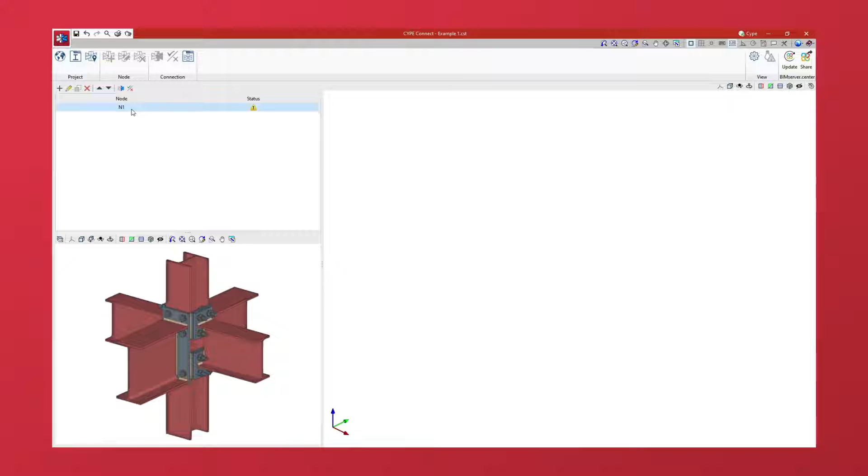Let's see how to enter loads on sections in CYPE Connect. To do this, once the node has been created, we select it in the table on the left-hand side of the interface and edit the connection by clicking on the corresponding button at the top. In the Connection pop-up window, if the model of the connection is already complete, we go to the Analysis tab.

Then, we click on the Loads option in the top toolbar. In the pop-up window, we define the loads applied on the connection sections. We can also generate these loads automatically via Generate from the BIM model. We can also modify them or enter them manually. In this case, we select each of the sections in the table on the left where their reference is displayed.

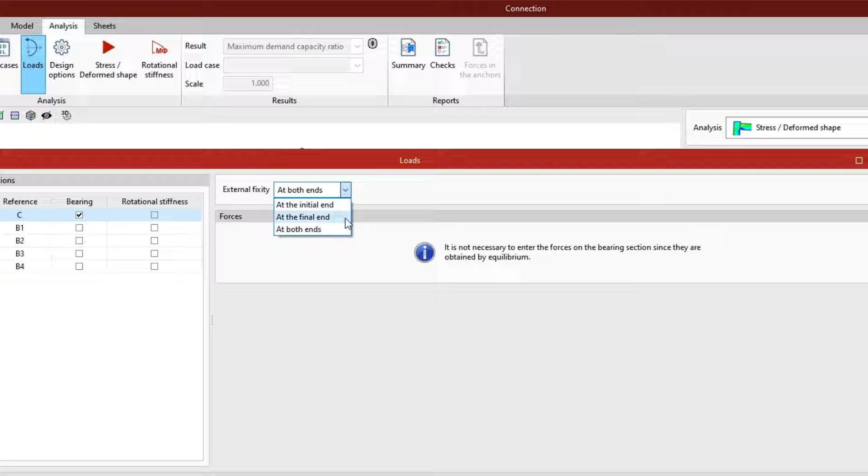We must define one of the connection sections as bearing by activating the corresponding checkbox. The bearing section has an external fixity at its end. If this section is continuous, we must indicate whether there is external fixity at the initial end, at the final end, or at both ends of the section by selecting one of the options from the drop-down menu on the right. We are also reminded that it is not necessary to enter the forces on the bearing section since they are obtained by equilibrium.

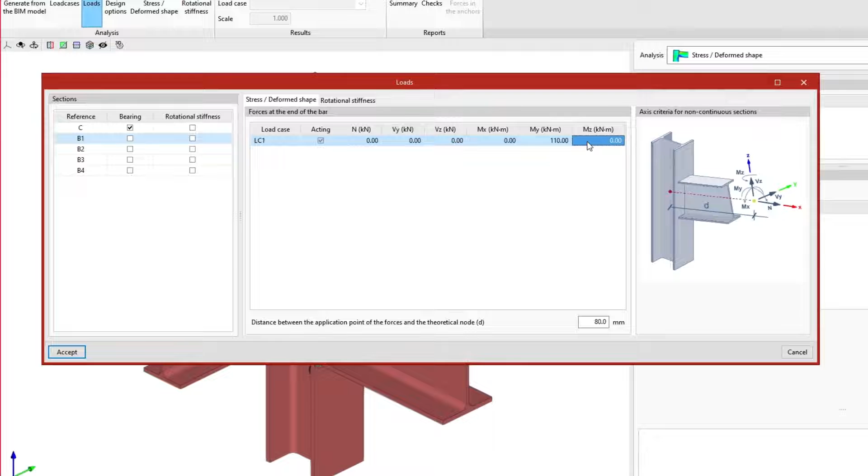Further on, we select the other sections, and in the Stress Deformed Shape tab, we enter the forces acting on each of them by filling in the cells of the central table. For each load case, we define the axial force, the shear forces in Y and Z, and the bending moments in X, Y, and Z in the indicated units. Right-clicking on cells brings up added features that allow us to copy and paste data directly from spreadsheets.

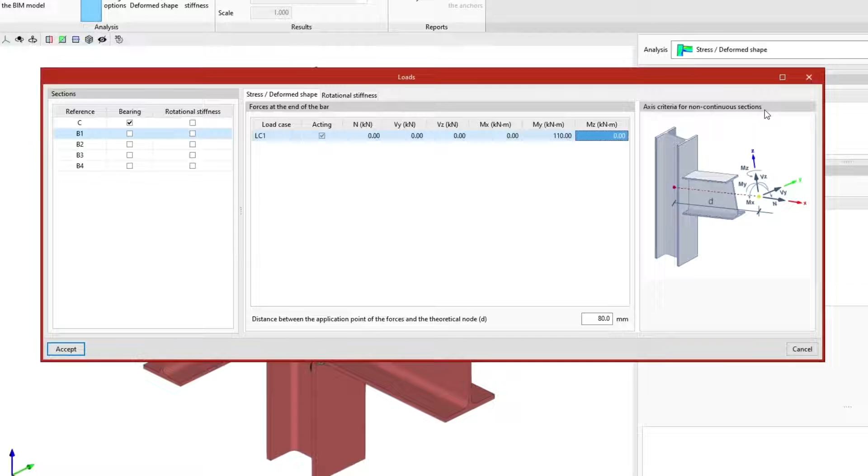The graph on the right displays the axis criteria corresponding to the types of sections we are working with, which can be non-continuous, as is our case, or continuous, which won't appear in the current example. At the bottom of the table, we type in the distance between the application point of the forces and the theoretical node. This way, we can indicate where we define the forces in each section. If we are entering the forces of the theoretical node, that is, the point of intersection of the section's axes, the distance value must be 0.

If we wish to enter the forces of another point, for example, those applied to the face of a column, we must type in a distance value equal to half the width of that column. This distance shall also be read from the BIM model, provided that the structure has been analysed considering the finite dimension of the nodes. In the diagram on the right, it appears as the letter D. In the design model, the program will apply loads at the end of each section to obtain the forces entered at the indicated point.

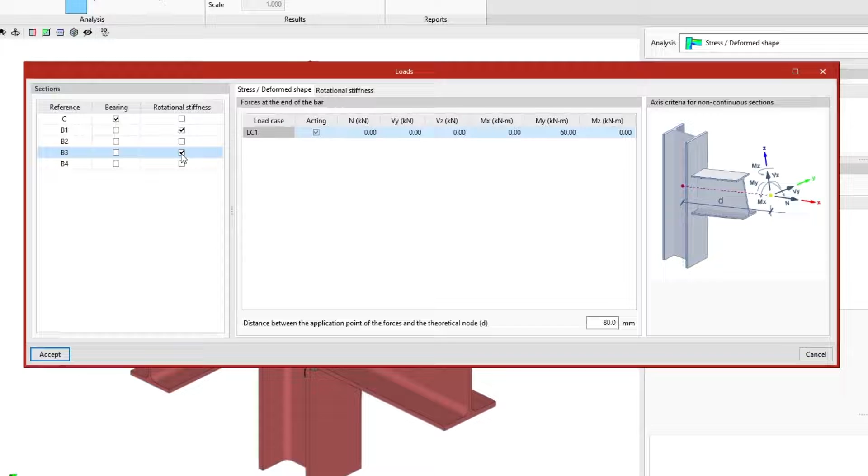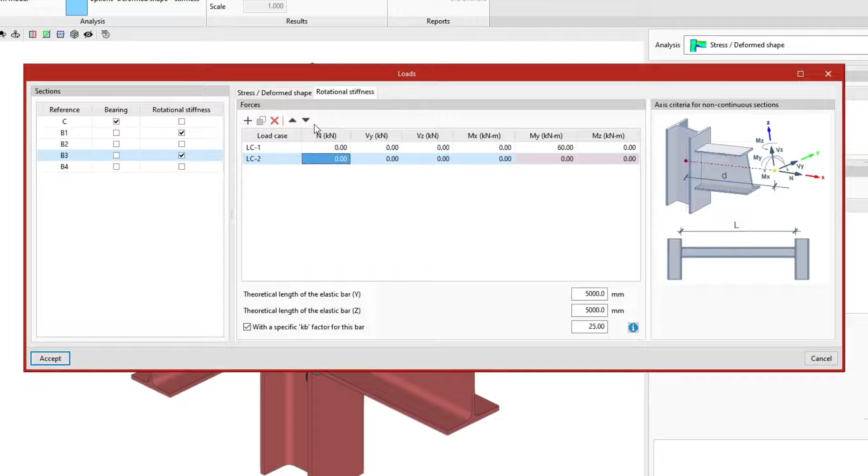Additionally, if we wish to consider the rotational stiffness, we must activate the corresponding checkbox in the desired sections. Then, in the Rotational Stiffness tab, we can add different load cases, creating a specific list of forces in which the load of the other bars does not affect the design of the rotational stiffness of the connection. At the top, we find tools that allow us to copy, delete, and move the elements in the list. Here, we define the forces applied on the connection section, which we may have generated automatically via Generate from the BIM model.

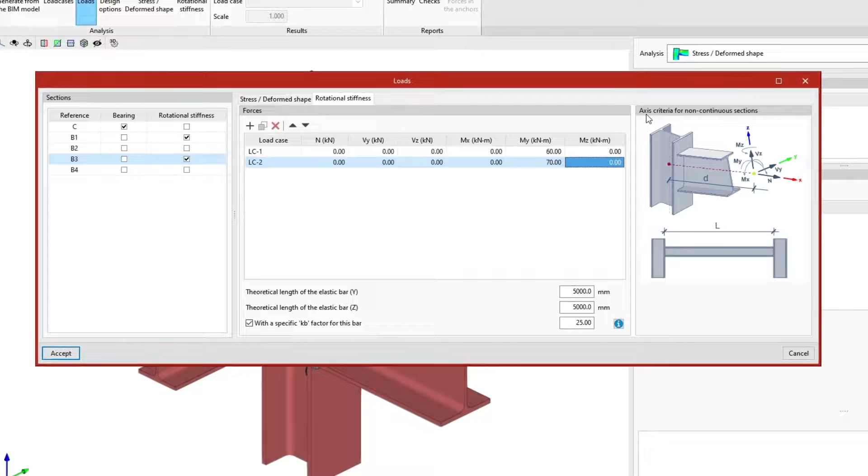For each load case, we define the axial force, the shear forces in Y and Z, and the bending moments in X, Y, and Z in the indicated units. We can also modify or enter them manually. In order to analyse the rotational stiffness, there must be at least one moment in Y or Z. Again, the graph on the right displays the axis criteria. Underneath, the L length is shown. Further down, in the middle, we indicate the theoretical length of the elastic bar Y and Z.

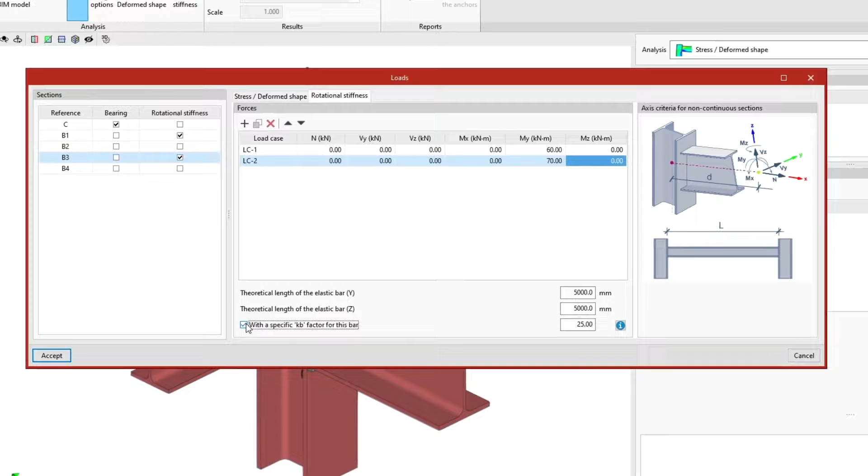We can also activate the checkbox to use a specific KB factor for this bar. Otherwise, we will use both the KB factor and the KB prime factor entered in the selected standard. On the right-hand side, there is a button with information on the factor KB, which shows a graph of the classification of the connection. Finally, we click Accept.